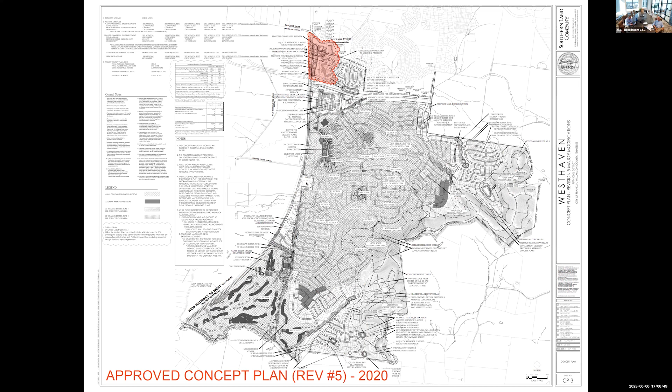Trying to get the page to turn. There we go. So again, we're talking about two different things: improvements to the plan and road layout, and change of building height. I'll get into a little more specifics about why we are required to make this change to the development plan. So I've now turned you a little bit from where we previously were. If you can see the hand on the screen, this is Highway 96, and this is Mac Hatcher that comes through here.

You can see the Kroger building, just again for orientation purposes, is sitting right here. So again, we're talking about this southeast quadrant, Mac Hatcher and 96. And this is the plan that was turned in with the concept plan.

One of the things with the concept plan, or the original revision 5 concept plan, also development plan, was that we did entitlements for the entire community, where we were getting entitled for a number of units, specifically more into different types of single family, townhomes, condos, all of that. A lot of the plan in the concept plan, when we're thinking about the greater community, is kind of a placeholder until we can really get focused on what specifically the specific areas that we're talking about.

And so in this case, you can see the large U-shaped building that we had here with surface parking that went all the way around the building out in front.

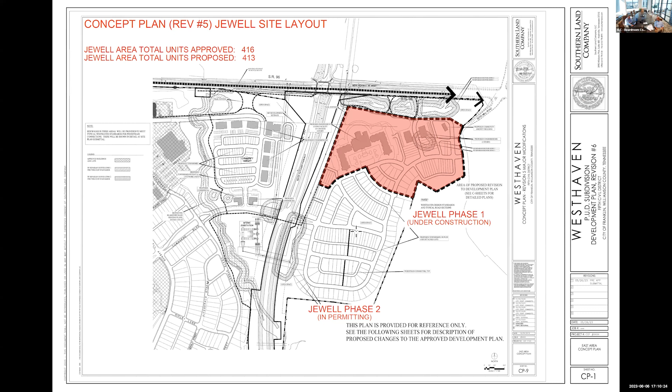So this is the proposed site plan revision, and I'll show you a little zoomed in version of it right now. You can see noted here, this area is Jewell Phase 1. It's an approved site plan, actually under construction currently. And then Jewell Phase 2 to the south, which I believe is going through permitting right now. Next on the list is this north portion where we have this active adult component.

What I'll point out here is, again, from a circulation standpoint, we really wanted to be intentional about where the road comes to a point and stops, and then still connects over to Boyd Mill, but really wanted to break apart the U-shaped building that you saw before, which didn't have any direct connection or visual connection to anything. So we brought a road in off of Boyd Mill that was more of a boulevard approach, flanked on both sides by townhomes and condo buildings, leading you to what I'll call the active adult facility itself. While it's still U-shaped, it's actually broken down quite a bit, both in height, scale, and massing, and really starts to create a green space out front. Let me go ahead and zoom in here.

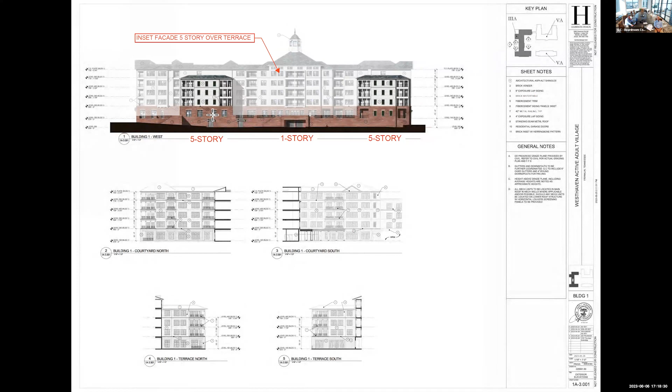And then as we go to building 2, this is the one that had the pool on the north side of the green. Instead of it just being an all 4-story building, we really wanted to break the architecture down in that building as well. So you can see how it steps down to 3 stories in certain portions, breaking this thing up so it didn't look like a big monolithic structure out there, and make it feel more village-like.

And as we go to building 3, which is on the south side of the green, flanking the green and boulevard, again stepping down the architecture at the ends of the building so the 4 stories creates the good scale and feeling you have walking on the streetscape and in the green space, but stepping down as we start to head towards the single family and condo buildings and townhomes that are outside of this facility itself.

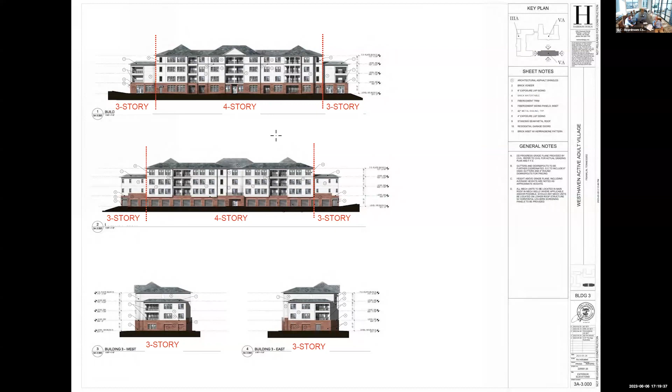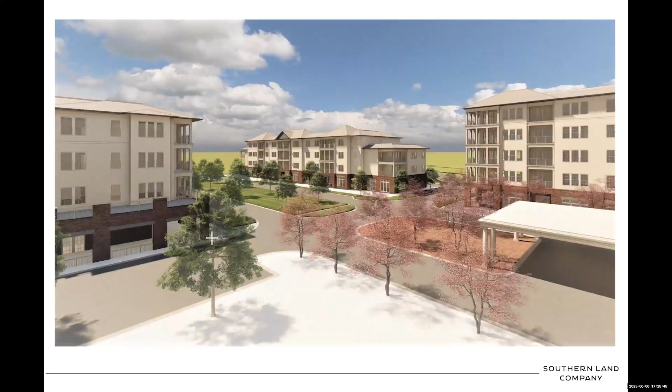I have a question about the overall site itself, more towards the back, the south part, I think it was phase 2. I was just curious what the setback is there, a few slides back. I'm wondering what the setback is for phase 2 against the neighboring property, the neighborhood back there - maybe a little bit farther back, the overall site.

We're glad to try to answer that question, but I want to reiterate that this call is focused on this active adult for-rent, the two changes. Shannon and I don't have that information to tell you it's 20 feet or whatever - that's part of an approved development plan. I wasn't part of that design, so I honestly can't give you an answer on that.

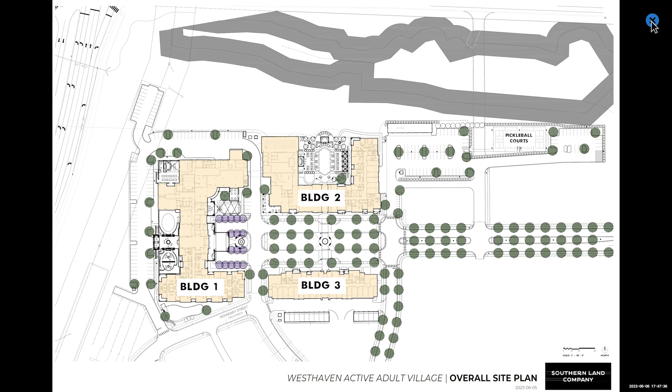Okay, great. Yeah, I think that might have been the missing link for some folks, understanding that will be an improved road, not only entrance, but road as well. So that's great. Thank you.

Yeah, I was trying to zoom in, I'm not able to while I'm doing the sharing, but yes, thank you, Richard, for pointing that out, because you can see these little dark lines are actually left arrows. So there is a middle turn lane that it looks like from about the end of this curve here all the way to the light. And then you can see a sidewalk on this side, the Jewell side of the property, as well as pedestrian crossings of Boyd Mill, looks like going back and connecting to 96. That's perfect, thank you very much.

Sure, didn't see anything else in the chat. Do others have questions? Looks like somebody raised their hand. Hi, this is Julie, I was wondering, when can we get on a wait list for the rental units?

That's a great question. I think once we start to understand the project schedule, but we will be creating some type of website, splash page, in the coming months. So Julie, I don't know if you wrote down my email, I can give it to you again, or if you got the notice, you could email Ben Crenshaw, whose information's on the notice. He can get the information to me, whichever you like.